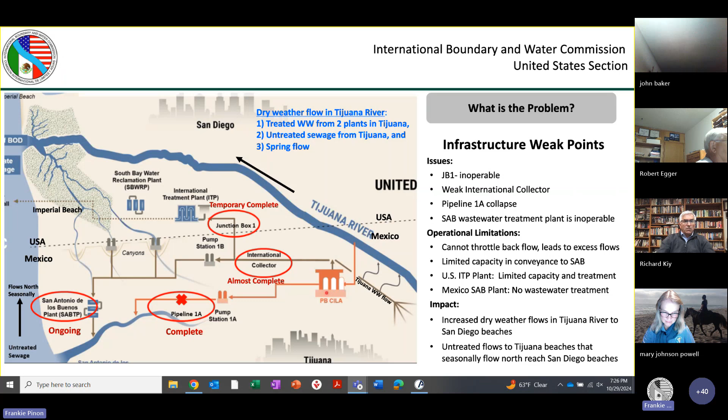I always say the IBWC, we are the boots on the border. We are protecting lives, we are protecting health, we are protecting water quality. That is what I'm— so given that, I think that's my last one.

To provide an update, mainly for compliance, we all are aware the main thing that we need to bring into operation again is the primary sedimentation. And we've made progress. We're still not where we want to be, but we continue to make progress.

We all are aware the tanks were offline from March 2023 to June 2024, when we started bringing some of our tanks online. We actually started doing some of them online in April of this year. And then we again faced some challenges. So we had things that we had brought online and then we went back offline for an issue with a chain and an issue with a non-sediment. So it's been challenging, but we're almost there.

As of September 30th, we now have 4 PSTs, so that is great news. Our last one, PST number 3, just needs to be completed this week, and then we'll start with the rehab. They're replacing and repairing all the mechanical components of the PSTs, and this will be the last week. Also, we already completed installation of our new influent pumps.

As many of you may recall, when we got the storm and the big fire in January, a lot of our pumps went out, and now we have the pumps installed.

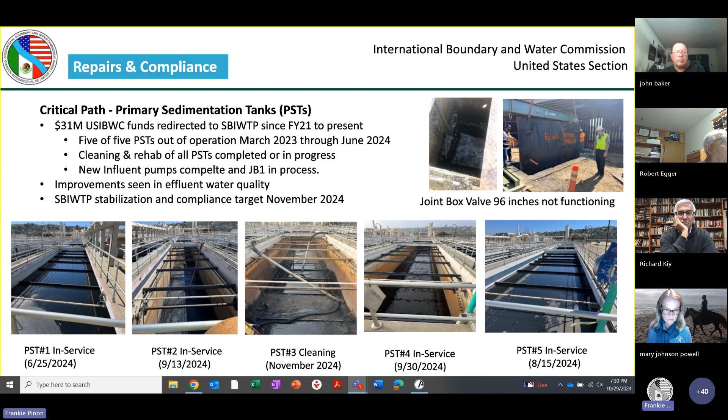The main highlight of this project, next slide. Excuse me, we can hardly hear. I don't know if you heard, turn the volume up or speak louder. So this project, okay, sorry.

So this project includes essential rehabilitation and expansion of the project. It will include the full scope, which includes doubling the project permits from 25 million gallons per day to 50 on average, and a peak flow of 75 MGD. This is a critical component of the binational agreement that the Commissioner mentioned.

In combination with the wastewater infrastructure improvements being done in Mexico under the Minute, this project is intended to eliminate up to 90% of untreated wastewater flow, which is intended to provide cleaner, safer water for local communities that can improve the environment. And of course, this project is in partnership with the U.S. Environmental Protection Agency, funded through the 2020 USMCA, the U.S. Mexico Canada Agreement, as well as with IBWC.

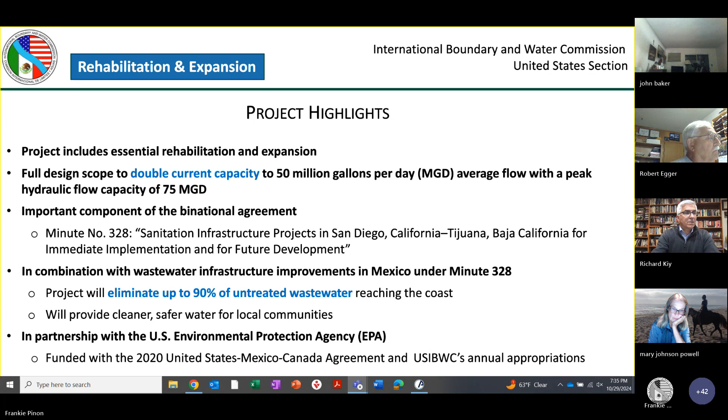Next slide. So this project was awarded on August 20th this year. It was awarded to our prime contractor, PCL Construction, and they selected Stantec Consulting Services as their designer.

The current award amount for the contract amount for design is 42.4 million. This first phase covers the entire design of the full scope, which includes again rehabilitation of the existing infrastructure to restore that plant to the necessary level, and for any additional items that have not yet been completed, and expansion of the plant to a 50 MGD average and 75 MGD peak.

What has not been awarded yet is the second phase, which is for construction. The construction will progress in various packages and tasks, some of which we'll discuss in a second, as the design is developed, and they'll be awarded progressively as those design aspects are completed.

The full project cost, including design, construction, contingencies, project management, and other support services, is estimated at about 600 million, which is based on an indicative construction estimate to date. Current funding that's been dedicated is 400 million, so that means we have a delta of 200 million in funding.

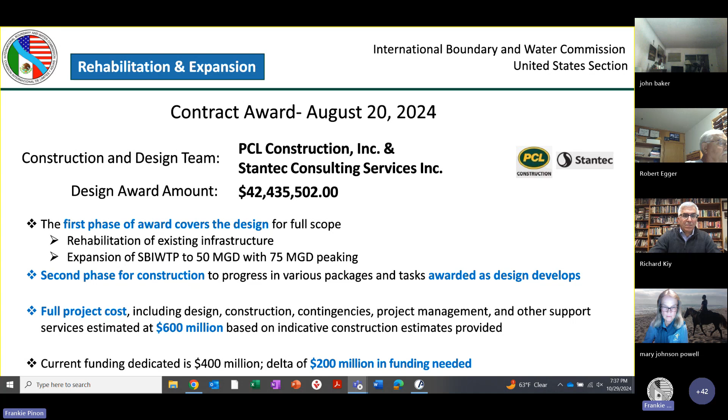The main reason this company, this partnership was selected, is because they came up with an innovative approach that gave us something very critical that we need at this point. We just unveiled this approach this afternoon, and I'll go through it as best as I can. The main highlight is that they'll use some of the existing infrastructure and convert the EQ basins and bays to different kinds of tanks.

That will then provide cost savings because it does not require building new activated sludge tanks as were required in the original plan. These savings then allow a new headworks facility to be built. The original scope just included rehabilitation of what's existing, but realizing how critical it is to address this preliminary treatment before it makes the rest of the plant vulnerable.

The new headwork facility will be providing not just rehabilitation, it will be more robust. So starting here at the entrance to the plant, we have the existing in blue, the blue is rehabilitation, the orange is an expansion part.

The influent pump station will be designed to use it rehabilitated, to then feed the new headwork facility. This will flow into the primary, which includes the rehabilitation of the existing primaries as well as the expansion with two new primary tanks.

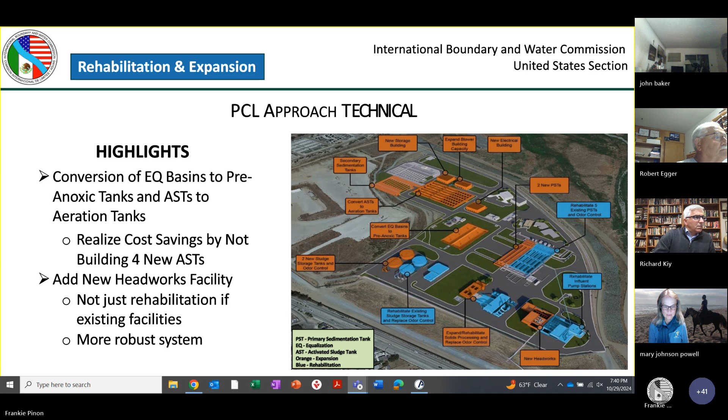Really, we have, like I said, this rare opportunity to really build this plant for what the community deserves.

So as the commissioner brought up, we are using progressive design build delivery method. Progressive design build is relatively new in the federal government, and it's something we wanted to use to take advantage of for this very complex project.

With still a design build team, we get a designer and a builder in one team. They work together, as well as reduced risk because they're not estimating early - we're progressively estimating the construction. We're not making assumptions early on that may change. There's also an integrated construction experience in the design because it's one team working together.

The design will be completed in 20 months, and as well for the construction schedule, it shortens the overall construction schedule. The typical traditional delivery methods include bidding out the project to a construction contractor, making that selection, and then getting into that construction.

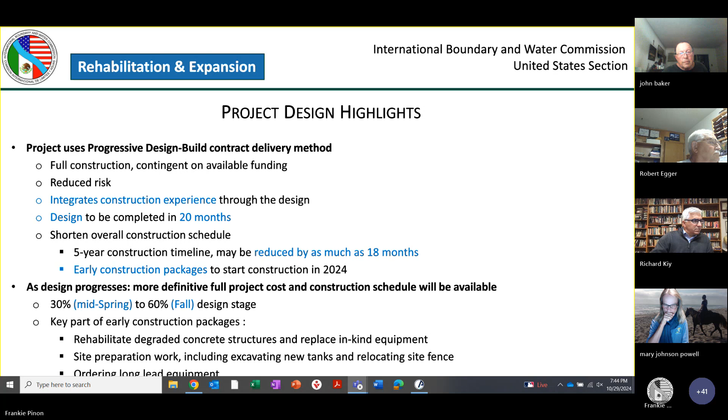What would be the factors that would reduce that timeline? So it depends on what the final design is. That's why there's a lot of aspects we currently don't know, just because there's still some assessment being done. There's still some factors being determined.

Part of this is at 30% design, we will start getting better clarity as far as the timeline. 30% design is in March. 60% design will be in fall, and that will have to lock in the front, so that will be kind of like a final period when we've got everything all the way down. With a lot of the notes of this project, almost every area needs to be patched. If it were just a traditional design, it would be 7 years.

So we want to shorten that. But the other thing we're also working with the contractor on is starting up parts of our plans as we're getting them done, so that we don't have to wait for the end. There's a lot of still moving pieces, and we will be informing citizens how those are to be shortened, how we're getting water quality improvements as we move forward.

Okay, so our third front that we're working on, an important piece of water quality improvement, one piece is what's happening with what we call minute 328. The minute process is before the IBWC has to make agreements with Mexico.

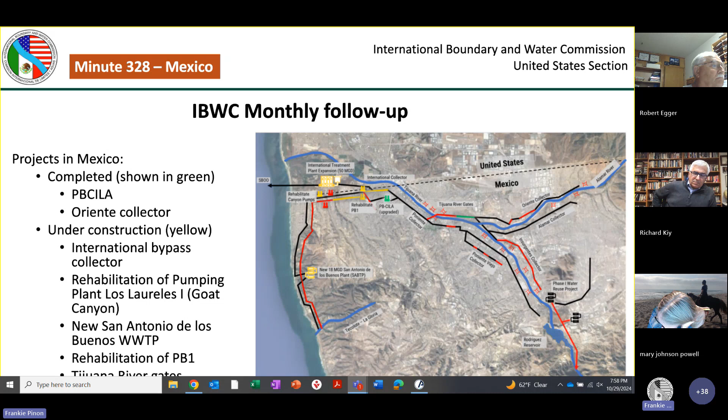The reason I want to make sure we're on the same page about one thing is because you're asking about all the money we've been able to get in this time frame. It's like, the number was up, can we go forward one slide? When we were looking at this - I've known since 2020. Let me just finish, and then I'll let you interrupt, let me finish.

But the additional increase in the IBWC budget that was obtained in the 2024 budget really was a shock to me. I mean, we were incredibly high. Everybody asked me how the trip went, and I said the trip was great, but I don't know where we're going to get the money, but we got it.

And so right now, the 2025 budget is not done. We're in a continuing resolution, but by all accounts, since there's been a bill passed by the House and Senate, there's another 170 million coming.

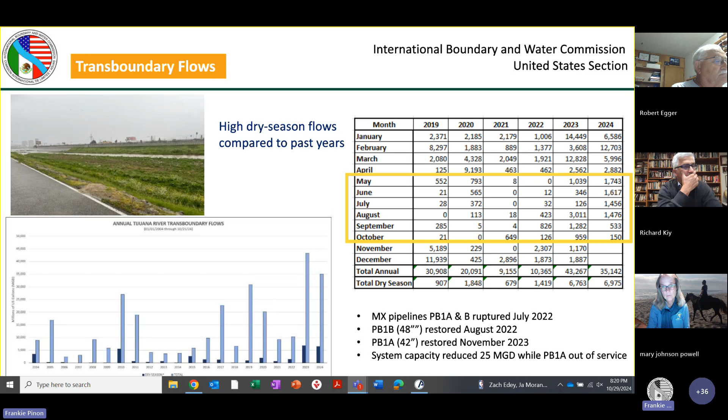This is where we're at. You can see correctly, this is September 11th, 2022, and we're down to about an average of 6 MGD. We are having the peaks in the evening.

Now that we have JP1, hopefully we'll get it up and operational, a temporary valve that we put in will get it operational next month. We should be able to throttle back north, and that will allow them to turn on their other pumps so that we can have zero flow.

That is the idea. Is that because of the international collector ultimately? The international collector is still a weak point, it's still not sufficient.

Is that why they can't turn on the second system right now? No, they cannot turn it on because we cannot take more than 25 MGD, permitted. And we cannot throttle back the flow because of that 96-inch valve that has been operating. So we're going to get that with the temporary one we put in, meanwhile the other one will be done.

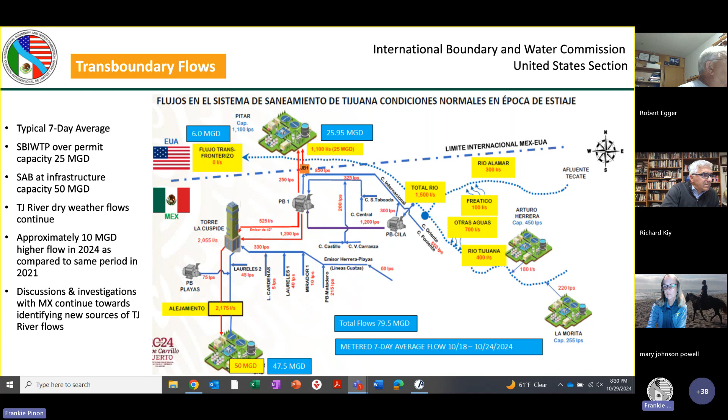Okay, let's do one more, I think that's it on our four approaches. We have time for one question. Yes, I want to see what the asset management -- there's a lot of work so that we don't get to the point again on our asset management, and we have people that are really tough on each step of construction, so I'm glad to see that we're doing the design-build contracting methodology, and alternative contracting methodology, which makes perfect sense for the project.

What about downstream contracting? Is anything being looked at between IBWC and PCL on any other alternative contracting methodology, used with trade contractors to speed up the project?

I'll let Ray answer that, because we do have some requirements for local labor in there. Well, within the PDB contract with PCL standard, that is our main contract. At this point, for the contract we're going to start looking for the best mechanisms, working with them because it's progressive design. We are continually going through estimates and work that needs to be done so that we can forecast and get the best information on what we can afford, and that helps drive what contracts are going to be able to happen. There's a requirement that we have to use a PLA because of the amount of money involved, and we have to use local labor, local labor union.

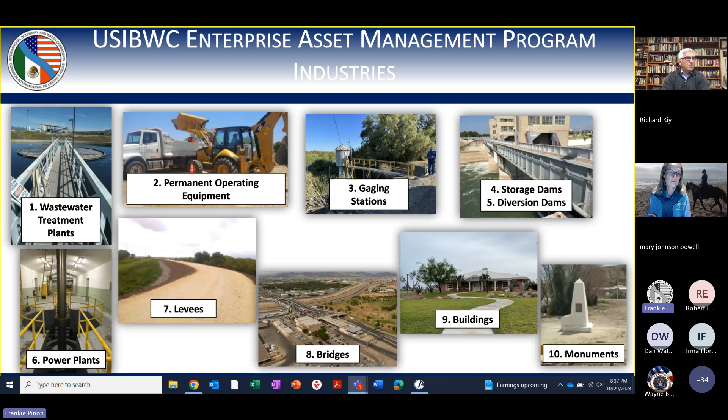As it pertains to San Diego, or the South Bay treatment plant, we've got that wastewater treatment plant, POE, monuments, buildings, levees, and gaging stations. Our main focus in the initial startup implementation of the program will be starting with our wastewater treatment plant.

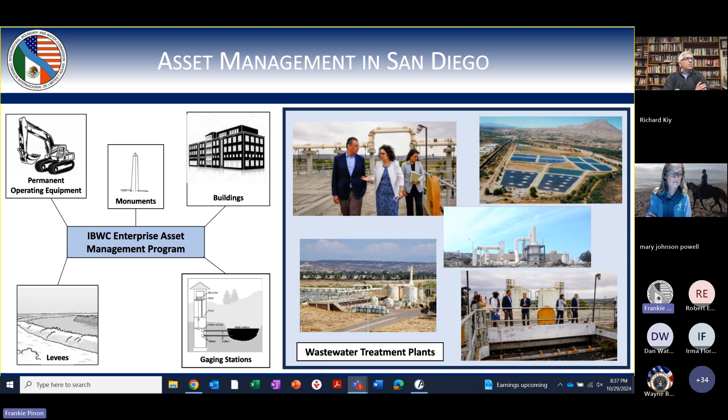A lot of the work was already done with the assessment or rehabilitation report that was done back in 2022 and 2023. In that report overall, 1,417 assets were identified. That took care of a lot of the work already with identifying what we have here in San Diego, across 8 categories and 102 different asset classes.

So we will be back with the asset management team here next month to revalidate that inventory and identify what changed from then to now. That's just the wastewater treatment plant. One of the slides in a previous presentation had a map highlighting how many assets and components are really at that wastewater treatment plant, quite a bit.

So here's a quick background and history of asset management at the IBWC. Before Commissioner Giner came on board and checked on the spreadsheet, there were a lot of individual asset management programs for the field offices, but she recognized the need for an upgrade or improved asset management program. That was back in '21, and the request for funding to Congress for that implementation was also in '21. That was approved in '22.

In '23 we really kicked off: we awarded a contract for the implementation of phase 1 of our asset management program. We completed the roadmap and began implementation of that asset management program plan for the wastewater treatment plant. In '24, last year, we began purchasing the software to augment the asset management program. In '25, we project to complete the asset management program for the wastewater treatment plant.

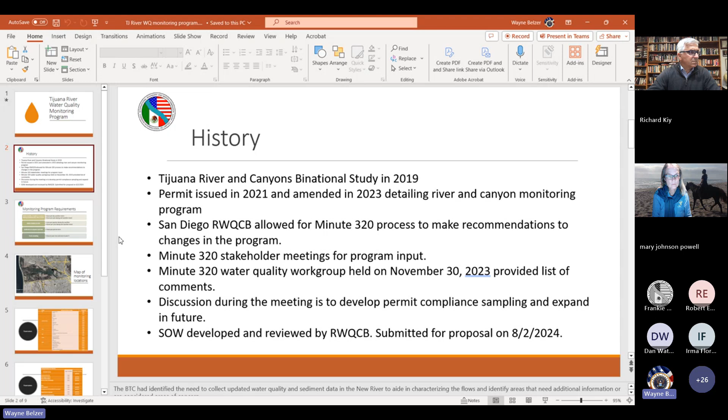To give a short summary of what this program includes: we're looking at water quality samples in the canyons, once per dry weather event and once per wet weather event, and water quality at the river at two locations - where it crosses the border at Dairy Mart Bridge, and before it empties into the ocean near Imperial Beach - tested once per quarter.

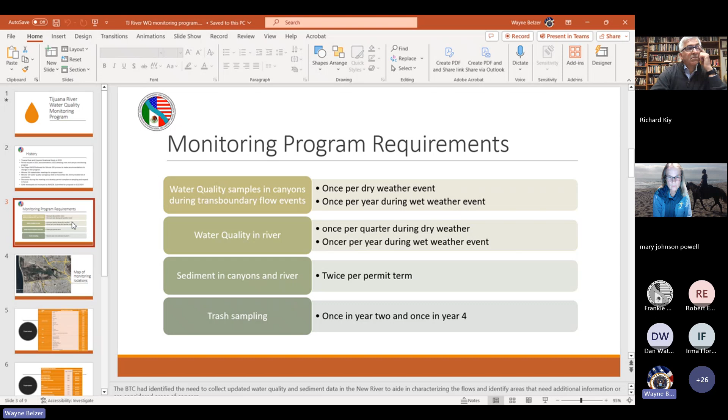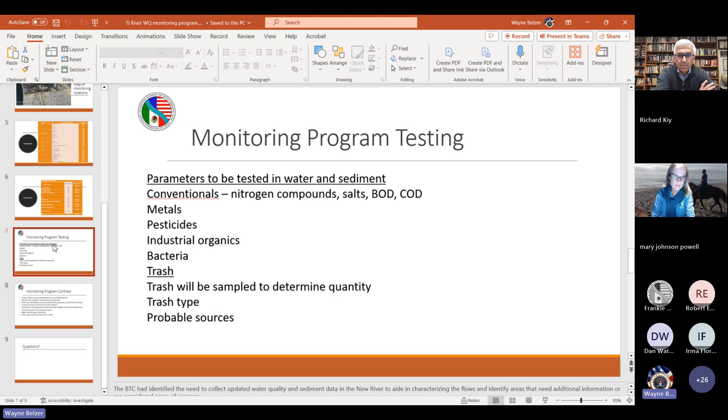To point out what we'd be testing: the regular compounds you see in a river, such as ammonia and BODs, but also metals, pesticides, industrial pollutants, bacteria, to identify any man-made impacts in the river, analyzed on a continuous basis.

So as I pointed out, we issued the contract - the company doing it is EGC Aegis. They're currently developing a QAPP. Once we receive that QAPP, we'll send it to the regional board for their record, and we'll begin our monitoring program. It is a U.S. side only program, I'll point that out - for the NPDES permit that we've developed.

So there, it only took 3 minutes. I could have gone into a lot more detail, but we've been developing this monitoring program for many years, trying to get it implemented at various stages.

It has begun, and we'll begin a continuous monitoring program. The data will be submitted to the regional board. It's part of our NPDES permit, so it will be going to the regional board and made publicly available for anybody who wants to review that data and see what kind of constituents and parameters are in the river and in the canyons whenever there is flow.

With that, just a brief update. That'll conclude that. I don't know, Frankie, if you wanted to go into questions, if we have time, or what you wanted to do next.